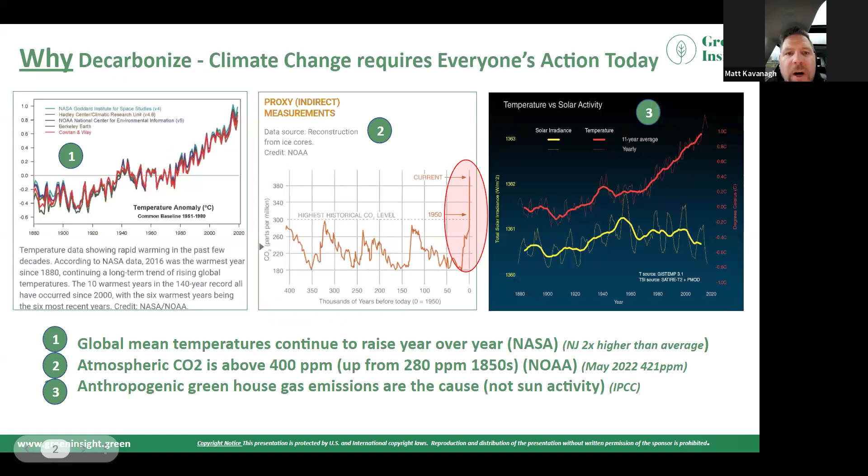So why decarbonize or electrify? I think some people think that electrification is a little bit different than decarbonization, but ultimately we're electrifying to decarbonize, right? The grid is becoming less and less carbon intensive with penetration of renewable energy at scale, and that's going to continue into the future. So the electricity that you get from the grid will be less and less carbon intensive, while today it's a little mix. It's got natural gas as well as coal and a couple other resources mixed in, but ultimately renewable energy is penetrating the grid.

So I also want to point out the right-hand slide, which shows solar activity versus temperature. I'm trying to make sure everyone's aware that irradiance from the sun has actually decreased a little bit while temperatures globally have increased, as well as heating oceans and a clear spike in carbon emissions. So this is a driving reason for my ambitions, but at the same time, this is helpful to start with the why. So next slide.

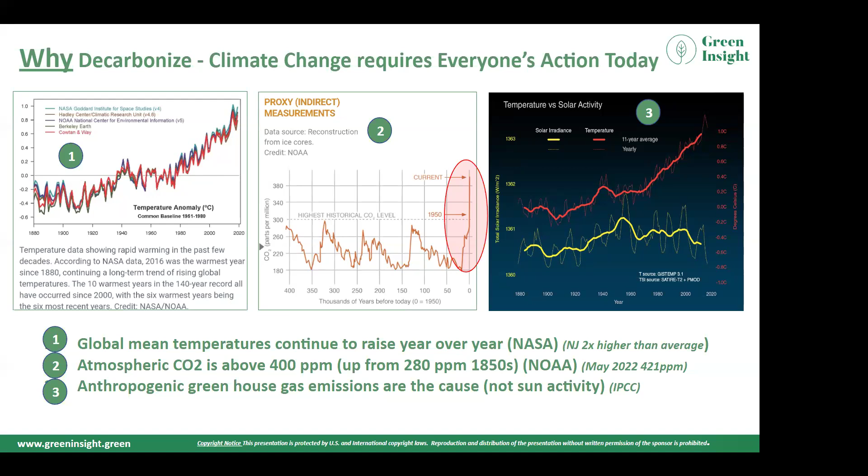Another why is that 2027 is really a mark of inflection for greenhouse gas reduction globally, as well as in the United States and New Jersey. New Jersey happens to be warming twice as fast as the rest of the country. And renewable energy and clean fuels and clean technology are really a solution here that we need to lean into.

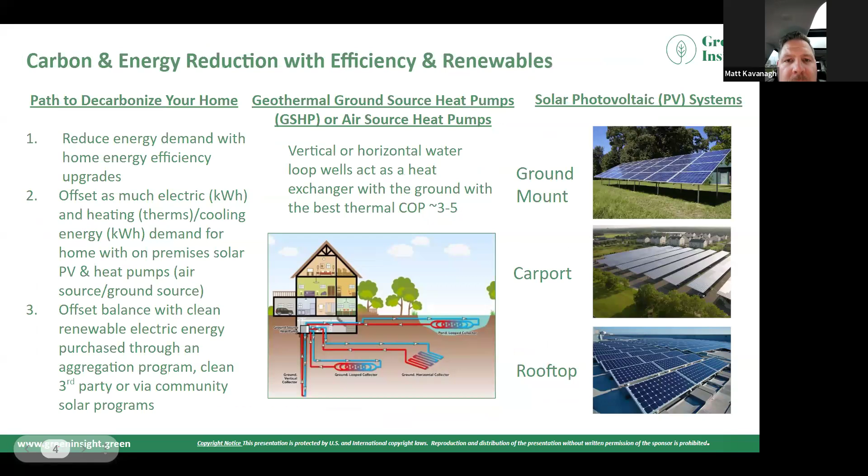Oh, I think you went one too far. Oh, sorry. Oh, okay. Oh, no, next, that slide.

That is it. Yep. So carbon and energy reduction with energy efficiency and renewables. The path to decarbonize is fairly simple at a very high level, which is reduce energy demand with home energy efficiency upgrades. There's plenty of services that do whole house energy evaluations, blower tests, as well as checking out your lighting and where your air leaks are. That's number one. Get your house tested and seal up the envelope as much as possible, upgrade where possible.

A lot of new utilities and features in your house can be more energy efficient, and there's plenty of means and mechanisms to do that. So consider replacing appliances with ones that use less energy or are more efficient. And then finally, once you do that, you want to offset as much electric and heating demand with solar and heat pumps, which are electric solutions, as possible.

And then the balance, you can consider buying clean renewable energy from third-party markets across the utility. In many places across the United States, electricity is deregulated, so you can purchase the actual kilowatt hours or electrons from a third party that is either 100% wind or 100% solar. You want to do that in instances where you can't offset your electric with solar. Maybe there's shade on your house. Maybe you have trouble installing a heat pump, but ultimately electrifying and then offsetting is the best way to go. And that's what I do.

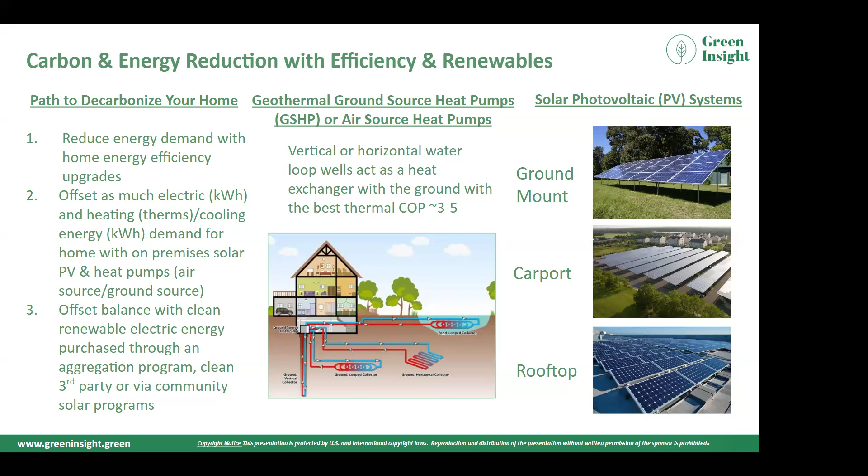Okay, so I'll go through residential case studies, including my carbon reduction plan and the microgrid I built at my house, and then also another one for Maryland, and then we could get into questions and answers. So next slide, please. There we go.

So first I want to explain what a microgrid is. The definition from DOE is a group of interconnected loads and distributed energy resources within defined boundaries that act as a single controllable entity with respect to the grid. A microgrid can connect and disconnect from the grid and enable it to operate in both grid-connected or island modes. And microgrids come in all shapes and sizes.

One of the things I learned as a reliability engineer was that a microgrid and distributed energy resources, solar and wind and battery storage or energy storage systems, allow you to set up property management energy ecosystems down to the home level. So this is very reliable when it's done well. A single family home like mine can go into island mode or be grid connected, and ultimately it serves as a microgrid. But similarly, a fleet or a community could be set up as a microgrid because of energy production and energy management.

Now, not all microgrids are the same. Maybe they can survive off-grid for an hour, 2 hours. It all depends upon how the load is and how the storage is. In my instance, I set it up so that I can almost survive indefinitely if the grid goes down with solar and a battery storage system, which I'll get into.

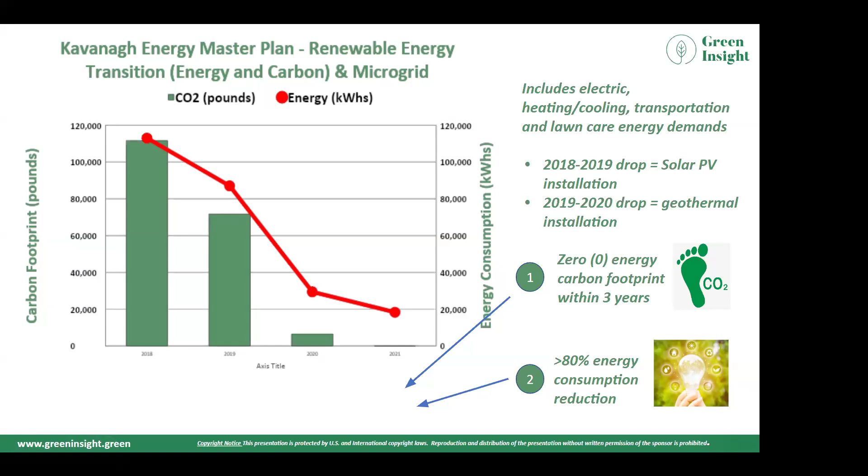So my next step is to get an electric pickup truck that's vehicle to building capable, vehicle to home, and add that to the microgrid so that it can back up my house as well. But overall, 80% gross energy reduction, and zero carbon emissions in 3 years. Now, you can do this faster, but I had a learning process through this, which I'm really happy to share with anyone on how to do this. All right, next slide, please.

So just to get a little bit into the cash flows, it's important to note that the plan that I put together was cash flow positive from day one, meaning that there was investments, but there was also investment tax credits that are good through 2032. So there's a good appetite and window of opportunity for these types of projects while the investment tax credit is there. But ultimately, the benefit is hedging myself against inflation, not paying for gasoline anymore, natural gas or electric.

There's $159,000 in net cash flow from this system over the next 25 years. All the systems have a 25-year warranty, and the ROI is about 8%. I took out a solar loan for 20 years and a geothermal loan for 5 years. But the immediate savings come from not buying natural gas anymore, not paying for electric. In New Jersey, there's SREC credits that you can monetize for your solar production, and then the investment tax credit brings down the net cost of these systems.

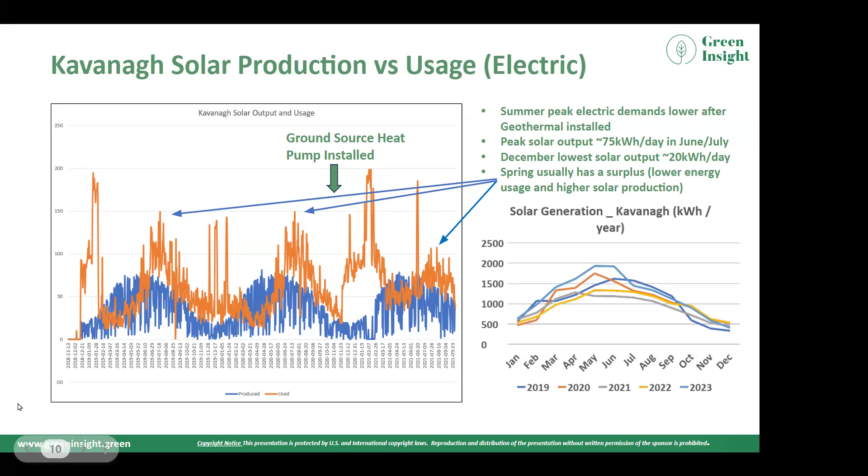The lower right-hand graph is the production of the solar system across the years from 2019 to 2023. This is what I enter into the GATS system in New Jersey, and what I use to get the SRECs. So there's variability year over year, but at the same time, there's also consistency from a standpoint of kilowatt hours. Next slide.

So a little bit about ground source heat pumps. Heat pumps are great in general. Ground source heat pump I went with because it was the most efficient per energy load, coefficient of performance of over 500% sometimes. It doesn't use any water when it's in production. You have year-round comfort. It's quiet.

There's low humidity in the house. It's also flexible design, so I can add extra loops if I needed. It improves the aesthetics because there's no heat exchanger on the outside of the house. So the pad where the heat exchanger was for the furnace or for the air conditioner has gone away.

It has very good environmental impact. It's durable without any exposed parts. Everything's underground or inside the house. That reduces vandalism and also has very low maintenance, typically 1/3 of furnace maintenance.

It also has zone heating and cooling, so I have baseload hydronic heating. So there's hot water baseboards, and then there's also forced hot air. So it's a dual system that the heat pump supports and makes very comfortable air as well as humidity in the house. Obviously, no fossil fuel supply chain, no natural gas or oil, and there's commercial and residential applications.

And if you have a piece of property, the geothermal loop in my yard is only about a 20 square foot area, 20 feet by 20 feet. They were able to drill 3 wells. So you don't actually need a lot of land if you're going vertical with these geothermal wells. That's what I did because there was a piece of property to the north of my house. I couldn't grow a garden. It was just a dirt patch, and it was also close to my furnace side. So I used that for the geothermal wells.

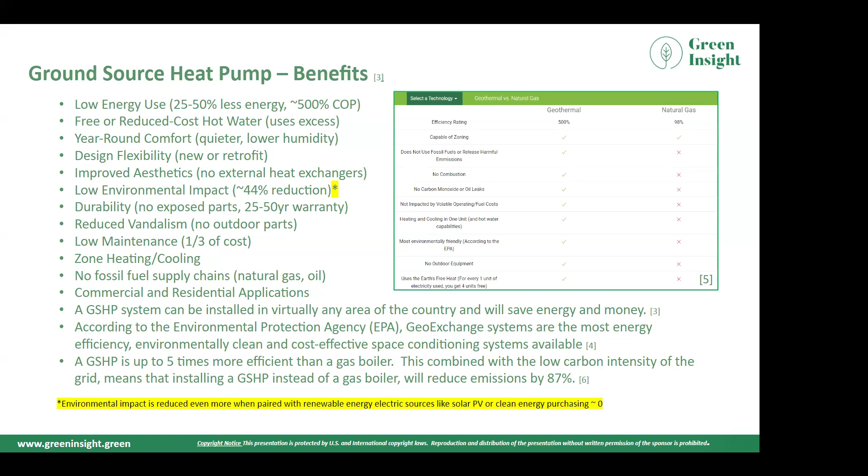And the environmental impacts are even better when you power it with a clean, 100% renewable, zero emission source like wind power, or like solar power, or a clean energy third-party purchasing means. So purchasing electricity or producing electricity to power the ground source heat pump brings the carbon emissions down to zero, right? So next slide, please.

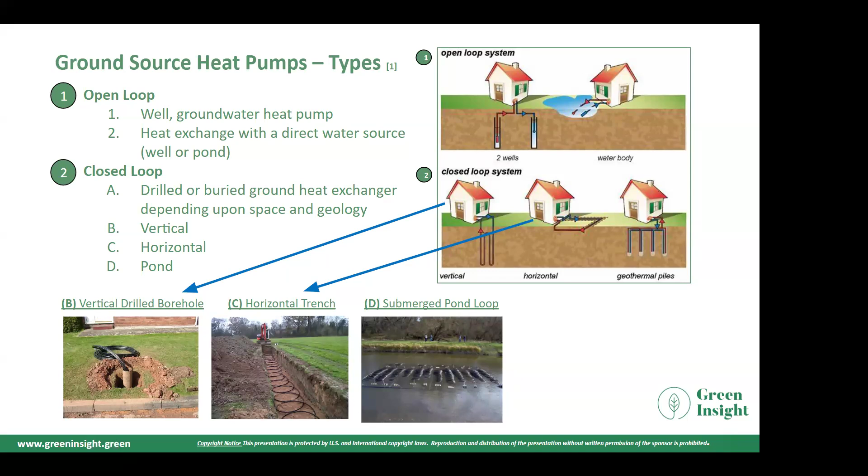So a little bit on geothermal systems. I did a lot of research because of this, but you can have an open loop or a closed loop geothermal system. You can have a horizontal trench. You can be submerged in a pond. You can do vertical drilling wells. In my case, I had 3 vertical wells, 250 feet down in Parsippany. So the total geo-exchange loop was 750 linear feet.

So it goes out of my house through the ground source heat pump loop, 750 feet, and then the water comes back in. So in the wintertime, the geothermal system is taking heat out of the ground and putting it into the house. In the summertime, it's taking heat out of the house and putting it into the ground. So it runs in reverse. So lots of flexibility here and a lot of applications.

You can also install a geothermal system with a well. If you have a well system, that's oftentimes applicable, and some of these systems cost less. So depending upon your land situation, or if you're close to a body of water or well, sometimes the cost of these systems can get much lower than mine. Mine was a retrofit, and I had to drill a geo-exchange well. Next slide, please.

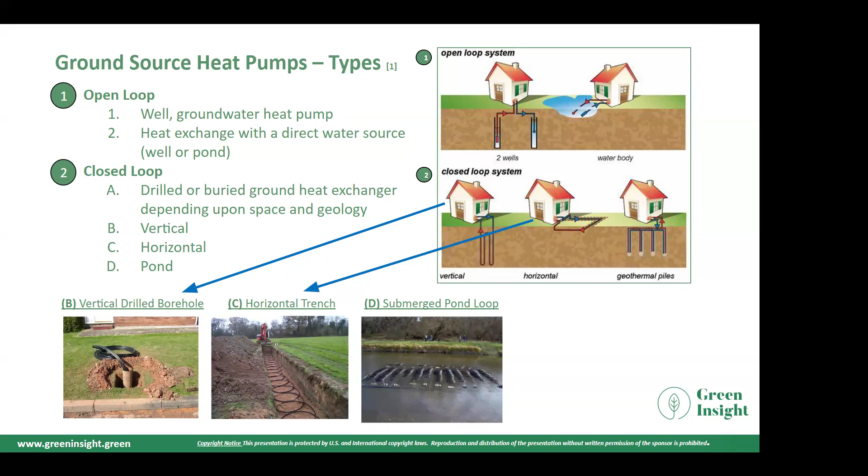So, I mentioned this is the geothermal system in my house. It includes a geothermal system, a stationary storage tank, as well as all my hot water heating. So the hot water gets heated up to around 120 degrees, as well as the baseboard water, and that's what we use for hot water. So we also did away with our hot water furnace.

And a heat pump is a central heating and cooling system. And ultimately, like I mentioned, in heating mode, you're extracting heat from the ground and putting it into the house. In cooling mode, you're moving heat to the ground from the house.

So we have the air handler in the attic. There's cold water that circulates through there. It cools the air. And ultimately, as you run the geothermal system, the heat goes out through the water and then gets put back into the ground. So it's very quiet and efficient. Next slide, please.

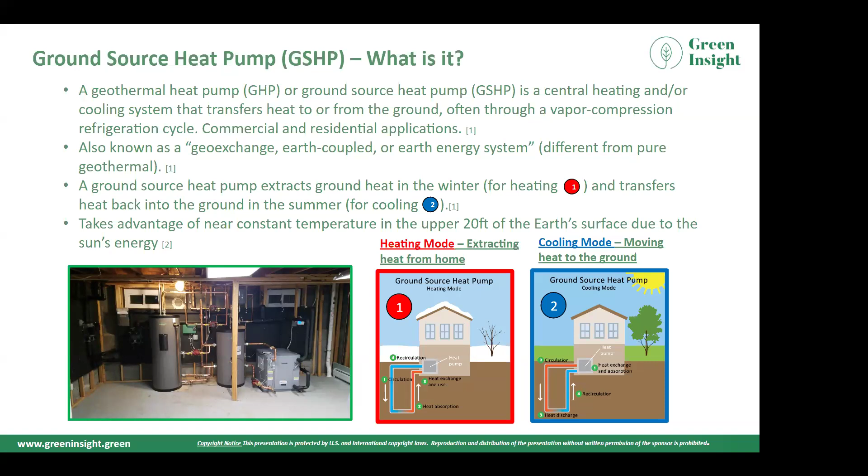So our geothermal system here was installed in 2020. It took about a week to drill the wells. As I mentioned, 3 250-foot vertical wells, as well as a completely underground loop. And then the installation inside the house took about a week or 6 days. So they went in the attic and they replaced the air handler for the air conditioning. They also put in 12 inches of blown-in insulation in the attic to make it even better.

In the basement, they replaced the hot water heater, all the pumps. They installed the storage tank and the WaterFurnace geothermal system, and then they removed the outside AC condenser. So you can see before and after pictures and what was removed: the furnace, the natural gas hot water heater, as well as the air handler and the condenser on the outside. And then what was installed was this equipment.

I do love this picture of the capped emission vent. They plugged it with concrete, so you can see very clearly where the emissions were going from the furnace, and no longer is that the case. Next slide, please.

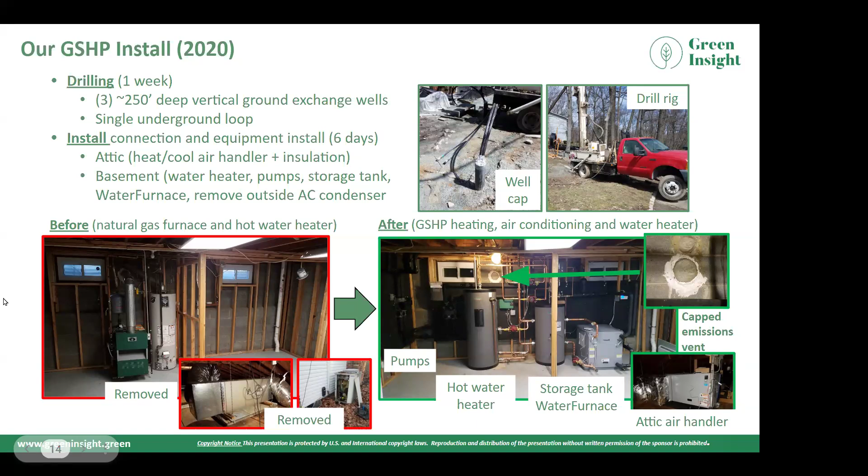And then the final piece that I installed for the house was a SunPower SunVault energy storage system. This was 52 kilowatt hours. You can see a picture in the lower right-hand corner. I installed it in my garage, which is pretty nice temperature. It's warmer than the outside air, but it's also perfectly fine in our weather conditions. So I installed that in 2022.

It backs up the entire house, including EV vehicles. It backs up and powers the geothermal system. So in the wintertime, if the grid goes out, I can still heat my house. In the summertime, if the grid goes out, I can still cool my house and keep all electrical loads backed up. It also pairs with the solar system and recharges during the day. So when the sun is out, it's recharging the batteries.

And then when those are needed in island mode, I have it in emergency standby, but it can also be used to balance load with virtual power plants. Now, New Jersey doesn't have a VPP program, but ultimately the grid benefits of an energy storage system are there as well. I'm hoping New Jersey opens up something like this, but the idea is that this energy storage system could stay in island mode, but at the same time provide grid services to neighbors or the grid by balancing frequency, using arbitrage, being a backup load for the grid or other grid means so that it's not wasted.

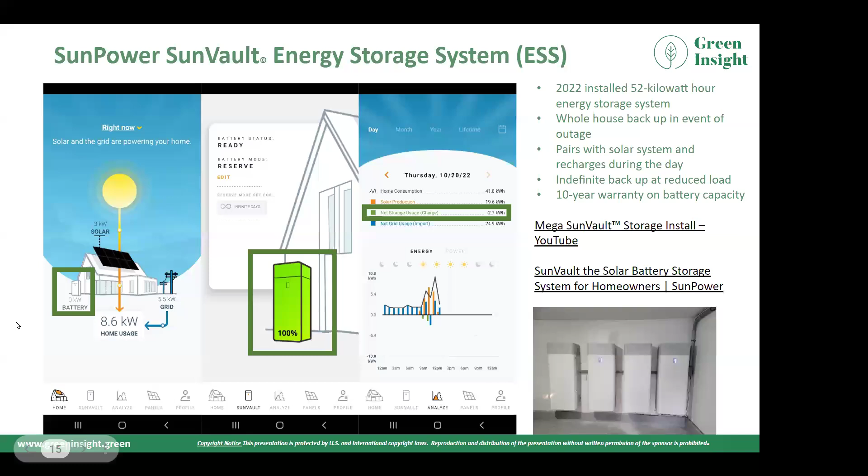And there's a lot of interesting EVs that are coming out now, or plug-in hybrids that are very viable for your house and good solutions. There's also tax credits for vehicles as well. Next slide, please.

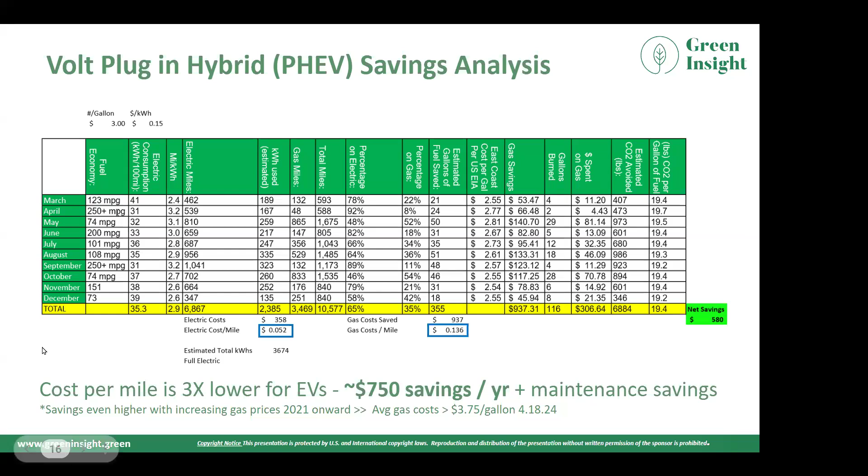Yeah, so that's the presentation. I have an appendix which will be distributed. In the appendix is my references, as well as a lot more on renewables, solar, and how some of these systems and things work. But I'm happy to answer any questions.